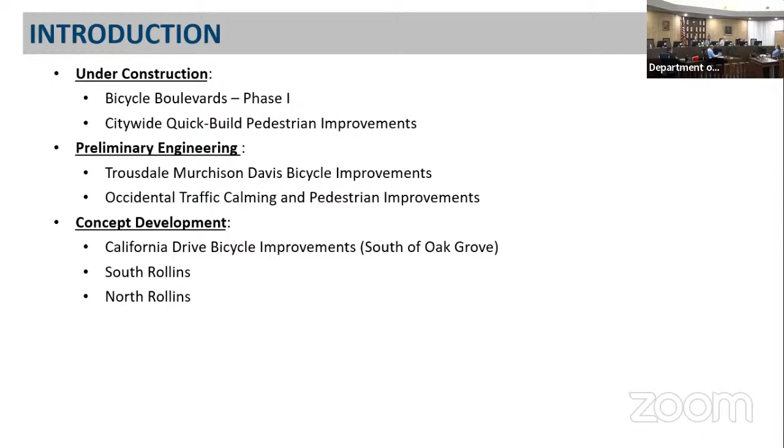So just quickly going over, this is the Bicycle Boulevard project, Grove Mills - that was the one I missed. Along these routes, some improvements were put in, some speed cushions, which you've been seeing about, we'll talk about later. And then stop signs, new green-back sharrows, things like that have been placed on this project. I think we also improved some intersections while we were there. So there's that project - the Bicycle Boulevard project, which should be wrapping up this summer.

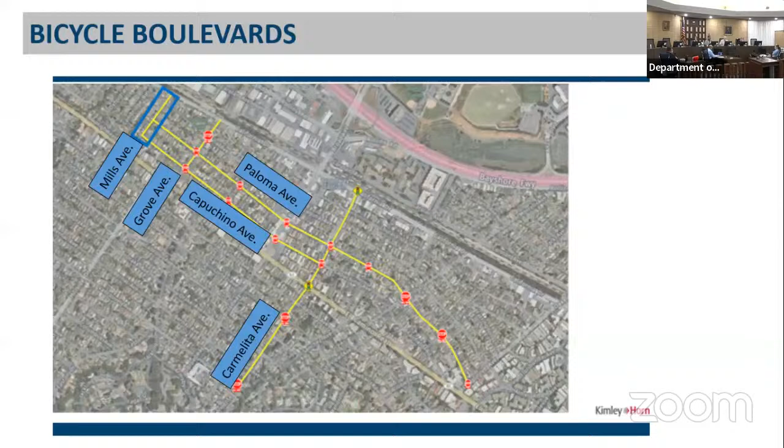This is the pedestrian quick build project, this one being grant funded, several locations where we did enhanced crosswalks, flashing beacon out there at Airport and Beach, which will come online pretty soon. And then those bulb outs where we're tightening up the intersections a little bit to slow people down, so that they have to slow down to make the turn rather than roll through.

Again, the Candyland chart, as you can see, these are well through it. They're actually under project construction and soon to be completed where we have to close it out. So those are pretty far along. That said, we'll talk about that one a little later under our update to give you just a little bit more.

Now, Murchison, Trousdale, Davis Bicycle Improvement Project. So this is a project where along those 3 streets, spanning from Murchison from California to Sequoia, Trousdale from California to Quesada, and Davis from Albemarle to Quesada, we're talking about putting in bicycle facilities on each of those streets. That ranges from Class 2B, which is a Class 2 buffered facility, to just a bicycle boulevard.

So we've met with the community once on that, and we're going to bring it back to them, and you'll see when the next tentative date for the next meeting is. But I think I'd like to see if we can bring that back even to TSPC, just to try to reach out to as many folks as we can via Zoom, where they can attend and watch it on Zoom, maybe if they can't attend in person. So maybe add another layer of outreach. And so here's the Occidental.

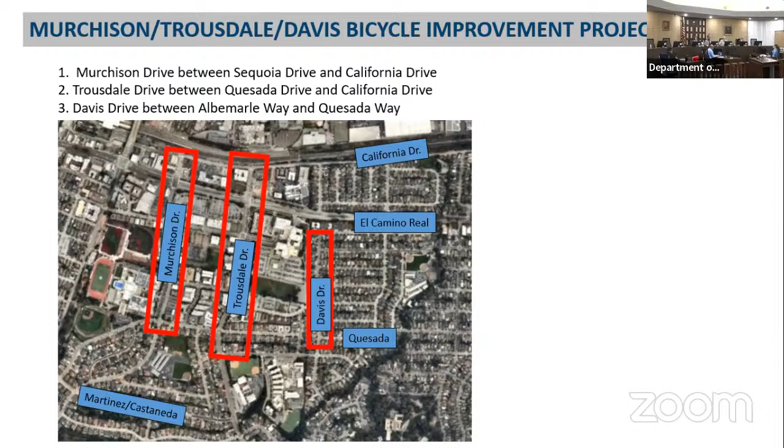Occidental, both Chapin and Ralston, we're doing some improvements there. Again, you could see some of these pork chop islands put in. We're trying to square up those intersections that are not square - they're offset and they're angled. So we're trying to do some improvements there.

We will bring this one back. Harry had been to the community twice. I think we've nailed it down pretty well, and we'll share it with you folks, and then you'll be able to see how the community feels on that.

So these are here in the initial design phase, where we're still getting the feedback, and then we're cranking through the design once we get that feedback. So we're somewhere in there on both of those. You're going to see that one for sure, but just wanted to give you again what it roughly looks like, so you guys aren't caught too cold.

Sorry, Mr. Wong. Sure. I'd like to just let them get through it, and then we'll do a little Q&A - questions and comments at the end. I'll make sure I write it down, if you don't mind. Thanks. Okay, and we're almost through.

South Rollins looks like this. These are some of these intersections along south of Broadway, all the way to Burlingame Avenue. We're trying to do some there, whether we call it chicanes - moving the traffic sideways a little bit so they have to slow down, as you can see there - or some traffic circles. Again, you'll see where this is at.

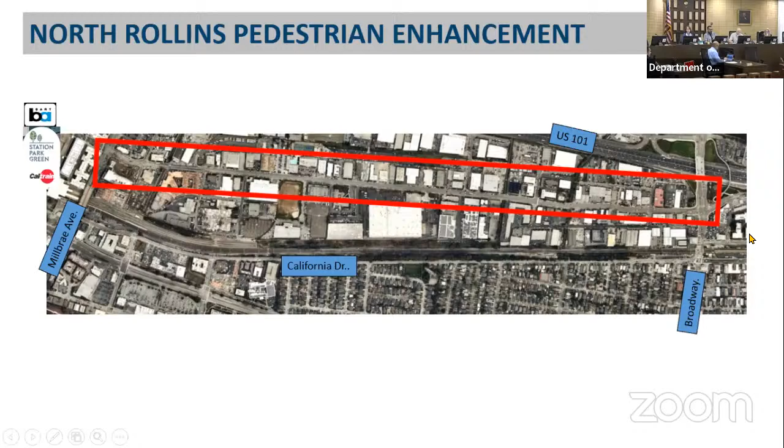And then lastly, the big one, California Bike Improvement Project. We'll call this phase 2 - phase 1 being, actually it's probably phase 3, because the first phase was between Millbrae and Broadway. So for explanatory purposes, it's now phase 2 with the other one that we just completed. We're looking at trying to do something along there to get you actually to the end, which we'll call the train station, right? Get students - they have people use that to get to BHS - but more importantly, the end destination being a Caltrain station, so you can catch that and go somewhere, as well as Burlingame Avenue.

And we are here on that one. We're in the very beginning stages. We just got grants for some of those. Council's approved some of the matching funds, and so we'll be moving forward.

So the upcoming schedule - the ones under construction, both the bicycle boulevards and the quick build, anticipated, most of it's done, but they should be done this summer. The preliminary engineering, the Trousdale Murchison Davis project, we're having our second community meeting. I think it's tentatively scheduled next month, the 6th, at the community center. I will definitely get you that finalized date and the location.

Occidental Traffic Calming Project, like I said, we've been out to the community twice. I think both meetings were productive, and the last one very productive as far as what the community wants and what seems like it'll work. So we may have that one here just to give you guys a look at it, but try to let the community know through outreach - the first one was a virtual meeting, and the second one was an in-person meeting, and the in-person one was successful. So I think we're good - we'll be hopefully pretty good on that one.

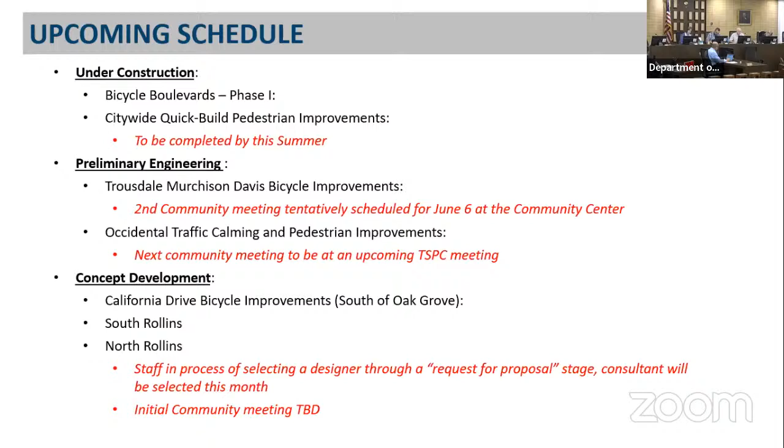I don't really have any questions or comments because it was all very clear, but I wanted to say—this sounds silly—when you pulled up the Candyland diagram to show us where we were on each project, that was really helpful to have a visual. I have to give credit where it's due though, that wasn't me, that was Commissioner Martos's idea. Nice job, give him the credit. It's super helpful, thank you. Kudos.

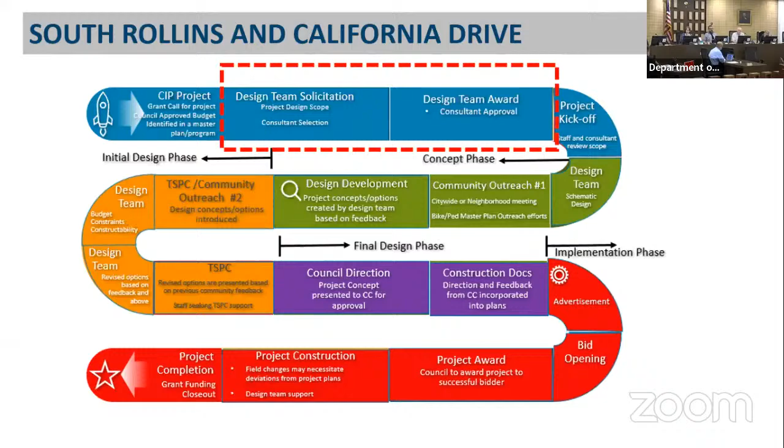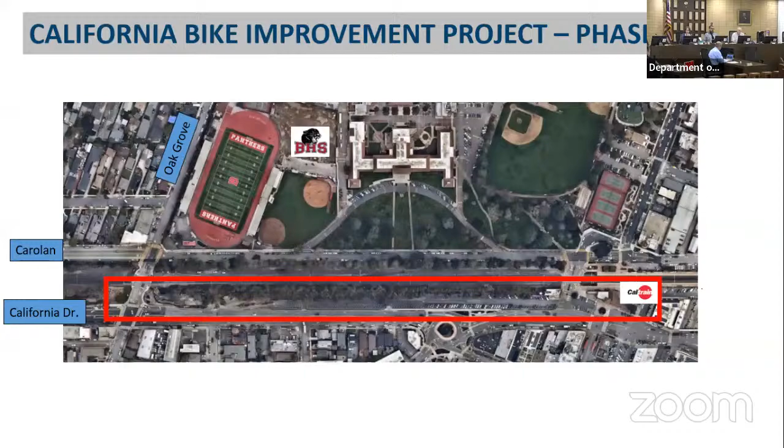It varies—sometimes we'll put something on there just to start the discussion, but what we put isn't necessarily what we're going to build. Because Occidental was in pre-engineering, the concept put out there is just ideas—not yet forming stakeholder needs into concepts. Or maybe we are.

These are a little more advanced—we started with concepts, and what we bring back next has the feedback from two community meetings, and there's a process developed out of that for how we'll proceed.

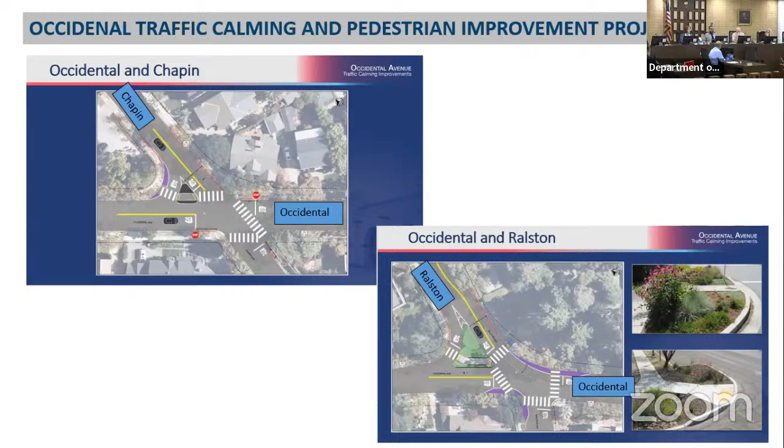In your chart it said this was pre-engineering, so I thought we hadn't gotten to the concept stage yet, but that's okay, it is what it is. I had a question about that—what was the genesis, the impetus, or the motivation to study that area?

So there was a grant we were selected for, on the bike ped master plan - we'll get to that later. It wasn't high level, but happened to be one there for traffic calming, probably through a neighborhood, put in there because of the grantor's input and was selected. Was it a result of community concerns? I recall BPD being called out to monitor speed and running stop signs - is it a response to that? Some of it. It was already in the bike ped master plan, then feedback came in, we shared it with the grantors, and they said that would be a good candidate. So kind of a perfect storm.

All right, good. So the process is working.

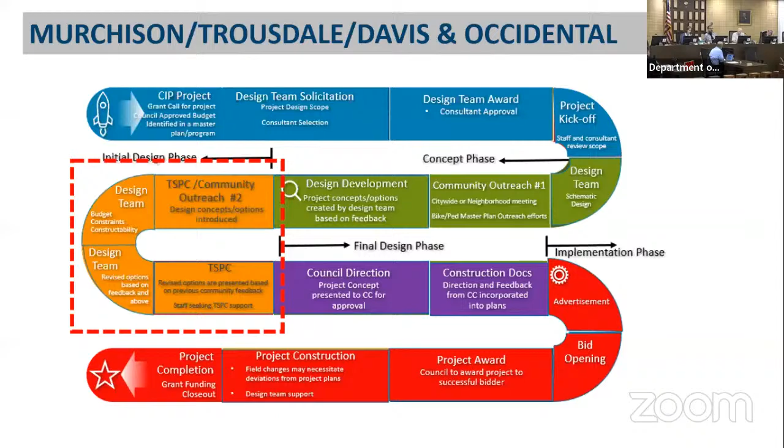I wanted to go to the pedestrian improvements, can you bring that up? Just a quick question on the first one - are all these done, in process, or planned to be done this year? That's a lot, and that's good. Yeah, but they're just striping - we can get into it on the engineer's report, but I believe it's 95% done. A lot of those, because we got some calls when they first went in. And the flashing beacon out there by the Bay Trail at Beach and Airport - we've marked it out. That's not in there yet; they need some parts apparently to complete that installation, but that's probably one of the last things here that's been installed. No, this is more praise - I'm happy to see it, even if it's just striping, or enhanced crosswalks or anything, but that's good progress.

I don't have any questions, but I've definitely noticed the quick builds around town. There's not one I'm not happy with, but some are more impressive than others - I like Howard and Lorton, that feels much safer. The Trousdale ones I think are really good, I can see the impacts slowing down traffic at those intersections. And down around Beach Boulevard, Beach and Airport. One thought - as Commissioner Cauchi would be aware, we had the 101 corridor subcommittee that sunsetted near the end of summer last year, and one of the areas in our purview was North Rollins. So I know that's going to go to concepts - I'd hope we keep that report in mind when exploring the concepts for North Rollins, at least as a reference.

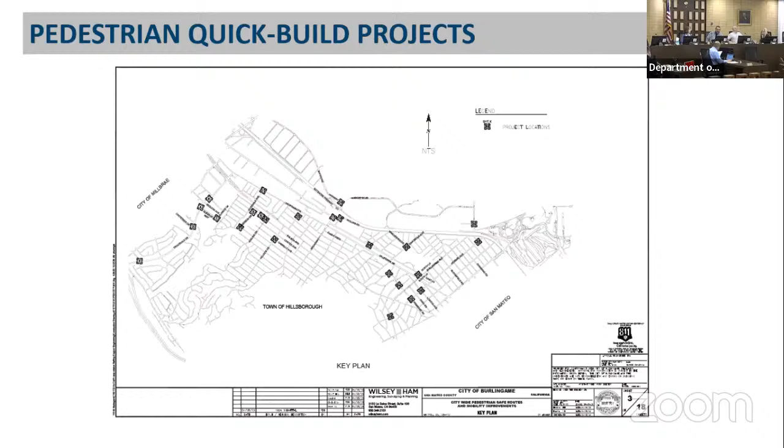Okay, we're all good. So I kind of feel like we sort of covered 6B, but I guess obviously we did not. Or did we accidentally cover 6B? Yeah, have to do our priority. It's just... yeah, I get to play around. I'm just confirming that this is actually a separate item because we touched on so much in that one. So we'll move on to 6B then. Okay, let's do this share.

Oh good, so this one, I guess I'll try to make it more interactive. So again, back in March we talked about the bike ped master plan and how we wanted to apply it to upcoming grants. I had shown you the unaddressed ones where I went through -- pay no attention to the mess below, that'll be part of it -- but all the lines through the projects that we either were working on, have worked on, or some that were completed. Even with this, you could tell we could probably add more completed ones on there, but it's the remaining ones, what we'd like done. Which ones do you think we should apply for, where we can say obviously we've vetted through the bike ped master plan, so that's already one level, but then it's gone through our commission and they support these -- and see how much weight that has when we apply for the grant, right?

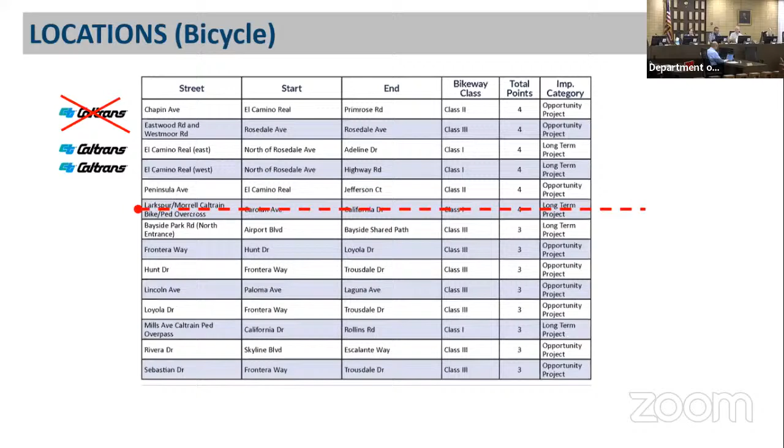So with that in mind, if we can pick off 3 bicycle ones and then pick off a bunch of the pedestrian ones, staff will go back and try to see if we could package it as a project. So turning it back over to the chair to see how you'd like to go about this exercise. I'm a little confused -- the ones that have lines through them, those you don't need to address, those we've done. There's a project, for instance, California Drive, Broadway to Carmelita -- we did that portion as well as Carmelita to Oak Grove as the Class IV facility you see out there now. So the ones that have no line through are the ones we were interested in getting feedback on and seeing which of those you're interested in. So we're going to try to pick from California Drive Howard to Peninsula, Oak Grove, Dwight neighborhood, Cadillac neighborhood, Oak Grove, Primrose, Howard, El Camino, Adeline, Bernal, and take 3 out of those -- as well as 5 peds.

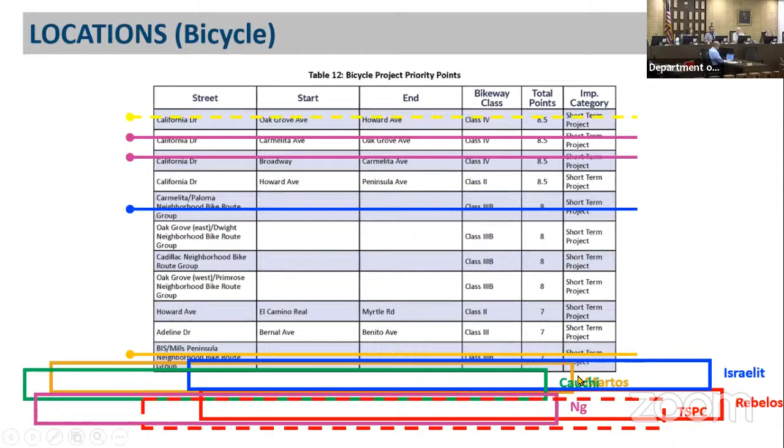We're using the overall schema. Just let's see which ones have choices. My concern is I can't see all of them on one page.

Take the pages off, do this. I kind of figured we'd see. Pay no attention to what I voted for. I'm not... don't be wrong. I haven't written... oh no, I have, never mind.

There we go. Let me ask my fellow commissioners this - have you all given this some previous thought? Yes, yes, yes. Okay, so that's more than I have. So then I know what I'm going to do.

All right, I'm going to hang on to this for a minute. You can obviously use it for your notes. I'm going to, if everyone is okay with this, we'll just go and each one of us will give their three, and then we'll see how coalesced we are, and then we'll go from there.

Okay, because if we all say the same three, you get a special box, a box with dashes on it - a rainbow box. I was prepared. Let me borrow that if you need it for reference. I'm gonna go last, I know what I'm going to talk about.

So let's start - we did the last one right to left, so we'll start with Commissioner Cauchi. So I'm going to add a little flair to this.

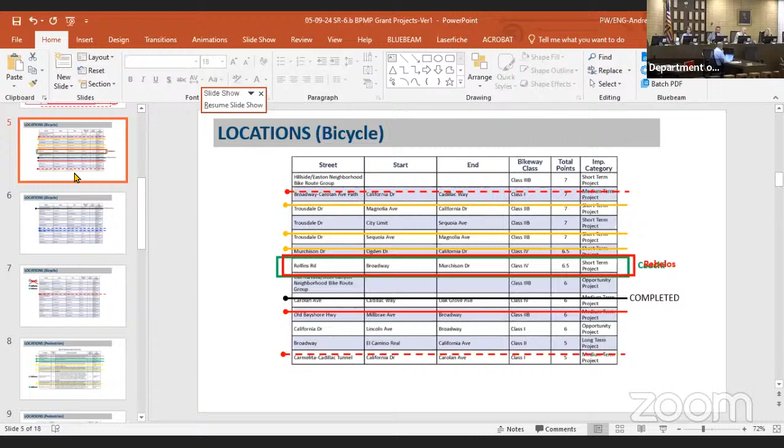Yeah, well, I mean, this round, we're just making comments? Well, I'm going to switch - if we're going to coalesce, or if there's just comments to make a point of why maybe somebody missed something, what your opinion is on that.

Well, I think the reason Oak Grove is important is it goes past McKinley and to the high school, so I think that's why it's a bike route. It's also, I think, one of the east-west connectors going to the bike lanes we have on Carolan and California. So that's one reason why I picked it - it connects two schools and connects east-west.

As far as I drive downtown recently, I don't know that I have ever seen - I found it surprising to see it on the list because I don't think I have ever seen bikes. Even when kids are going to school, they tend to go on Balboa and come to school that way. So to me, it didn't make sense at all - I couldn't see how it worked. It's super congested right there.

As cars come off of El Camino up Adeline to take kids to school, either Mercy or Lincoln, most Lincoln kids avoid it because it's not the safest place for them to ride their bikes to get to school. They come down Balboa instead. So I actually really don't like that option, but I don't know if it's going to happen anyway, since it's on the list.

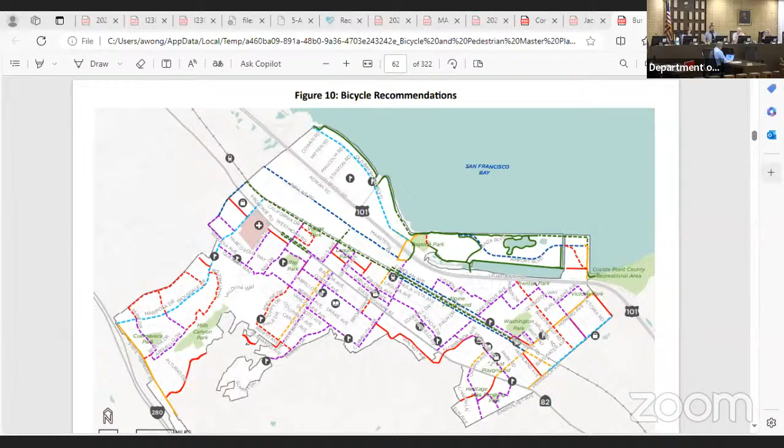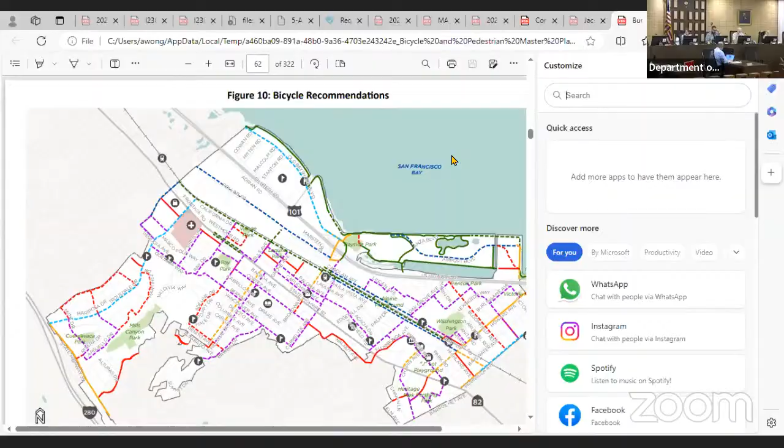Which one was the last one? Cadillac Neighborhood Bike Route - so the two Oak Groves and Cadillac Neighborhood Bike Route. Is there any way you could pull that up? Yes, it's right there, that little purple piece - right there by where the Audi is, connecting it, where then you go on the bike and enter the bike overcrossing. And that would be a quick build, correct? Yeah, that's just a small sharrow, but it would still be a project - we'd do outreach because you may have feedback from the businesses there. Does that connect all the way to the bike lane on Carolan? It does.

Through the chair? Sorry, I was just going to indicate, again, we don't have to come up with the same three things. We don't have to, because... No, but I mean, I reiterated. I just feel like at this point we're very scattered. Like I don't see a lot of alignment, but I think I'd have a path to that. I just have a couple of questions though. And I'm watching the clock, believe me.

So Cadillac, it just links - I want to fully wrap my head around it. So it's basically linking Carolan to Rollins? Yes, I mean, in essence, it's already there. It's just enhancing that with some sharrows.

And maybe some traffic calming. Indulge me one more time - why do you think that's so valuable? I'm not criticizing, no wrong, no right, I want to hear it again. Is it about traveling to Bayside across the overpass, the O'Mahony overpass? Actually, I get it.

Traveling down Carolan, there's nice bike lanes. And people want to get over to that O'Mahony Bridge to get over to Bayside. It'd be nice to complete that segment, and have some, dedicated, or not even dedicated, but sharrows and some traffic calming in that small segment.

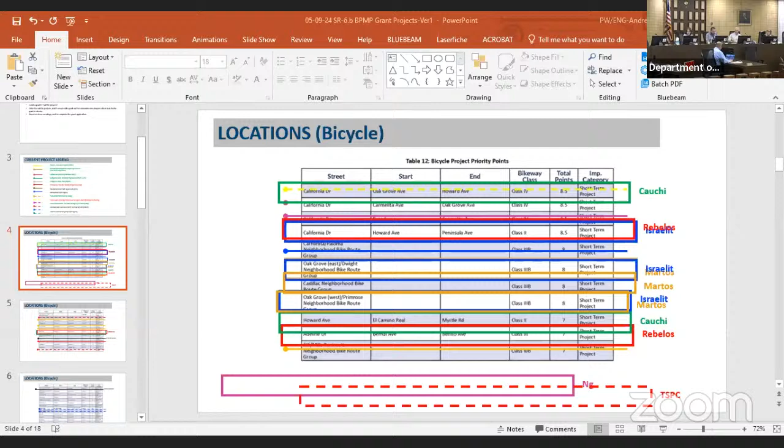It's been - I mean, obviously I worked on that 101 subcommittee, so connecting Rollins to downtown and to Broadway and to the Bayfront has been something near and dear to me. So with that, I'm now piecing together the Oak Grove East-West with the Cadillac. But I would like to see Rollins Broadway Murchison. So since I think we have two for the Oak Grove East-West, I'm gonna do the Broadway Murchison with Cadillac.

I mean, can you explain to me why Oak Grove East and West are two separate? Is it funding? Through the chair, I don't know how it was broken out, I can't recall.

But again, going back to the previous presentation, we have Capuchino, Paloma, Mills, Grove, all part of a bike boulevard project. So on this one, knowing that's important, we can combine the Cadillac, that Cadillac Oak Grove. And what Commissioner Martos indicated, those three, we can combine - that could be one project, right? We're just not going to do Class 3B because these are relatively minor.

We're not putting in a hard curb or something like that. Right, and it's just striping and mostly striping and then outreach, right, to let folks know what's happening and to minimize impacts.

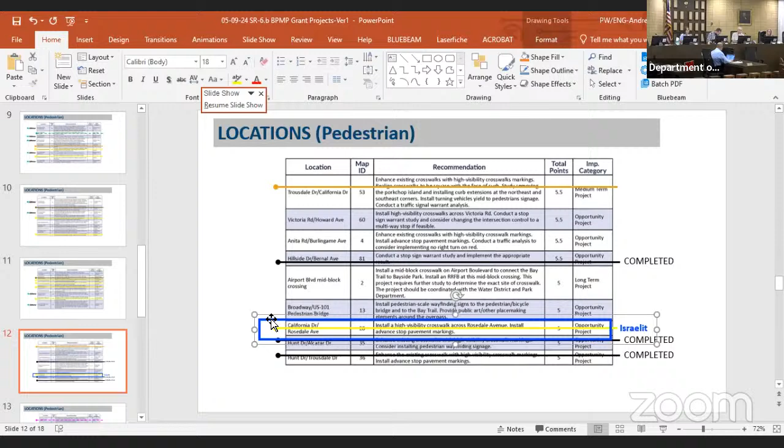Isn't that where you just put in a 4-way stop recently, or is that Albemarle and Ray? Balboa and Ray, I believe, has a 4-way stop but no crosswalks, right? So that's what I picked because a lot of kids walk to BIS, or it has crosswalks but maybe not, to Lincoln. There's tons of kids that crisscross to the 2 schools, so I think it's really important. I just picked 2 because the other ones I felt strongly about were all sort of taken care of, so I didn't have strong feelings about number 3.

Is that it? Yes, sir. Commissioner Cauchi? Right, I thought we were going this way. Oh, he's got my notes. No, but it's following how we began the meeting. Vice Chair Martos wanted to go after the right and left. So we're in the middle.

Okay, so I'm assuming the projects that have Caltrans on them will be taken care of. That's the goal. The Oak Grove and El Camino, again, because it's by a school, I think that needs extra attention. And the Burlingame El Camino needs extra attention because it's right by the downtown, but I'm assuming that will be taken care of.

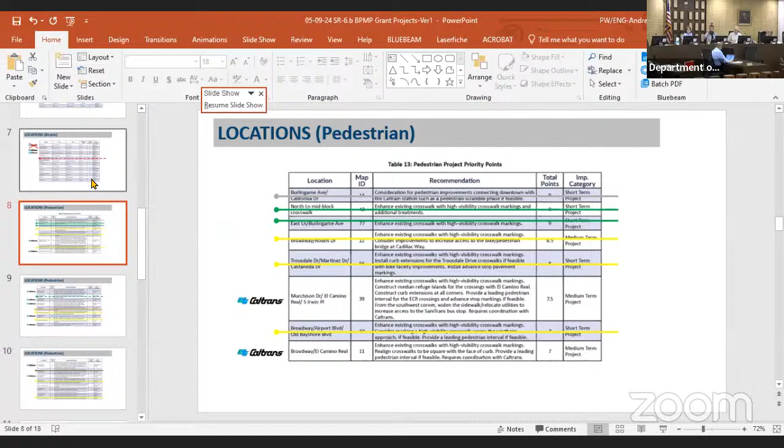The other ones that I was unsure of, just like we just talked about, so Burlingame Avenue, Lorton, Park Road, and Primrose. Those have all been done. It's actually on Burlingame Ave. And those I think we talked about a few meetings ago where we're trying to include those, again, opportunity project, trying to basically put some striping. This is the one where I worked with former Commissioner Lee about trying to just make those crosswalks pop.

And we agreed that we would just enhance the 12-inch line on each of it and leave the pavers as they are. So that's those, already happening, right? That is not happening. Well, there's not a project for it. We are aware of it and we're trying to incorporate it. So if you want to include that one, we could do that.

So we haven't designed anything, or we haven't laid it out yet. So potentially it could be done, but I haven't associated it with any work yet, either another striping project or a resurfacing project.

Can I ask a question? I know that was something Commissioner Lee had brought up, but I didn't realize that had been decided to happen. Because we do have the decorative pavers, and we have stoplights and stop signs at all those intersections where cars must stop. I thought with this group we talked about it, so for instance, you have the pavers and you have those concrete bands that hold the pavers.

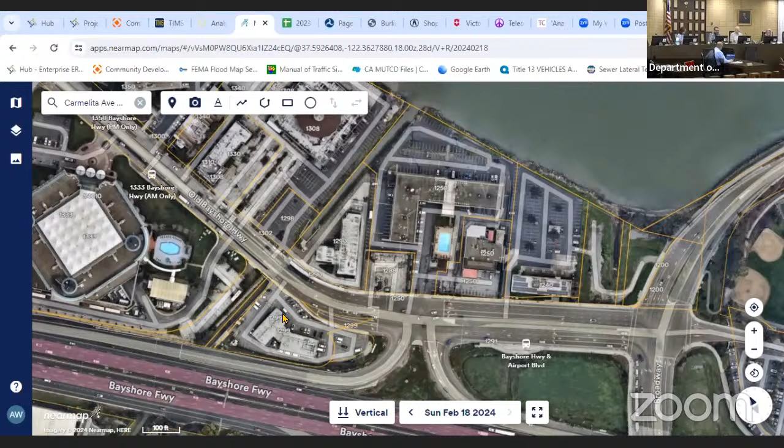If they get all the way up to where your arrow is, there's no place to cross there. So there'd be signs back there to say, cross now, a barricade or a barricade sidewalk, or last exit before toll.

I thought there was also going to be signs down near Broadway so people knew there was a pedestrian crossing. When I picked this, I thought it was also to guide people in other directions. We've looked at that a little bit, but there was still the question of when to time these improvements. I think that's where that discussion capped off.

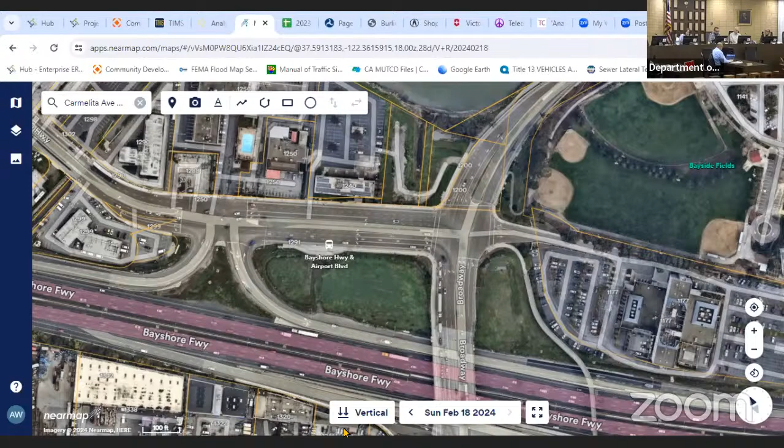My other pick was the one about making the temporary build-outs permanent. That's my second pick, and I just have two picks. I've got that one written down because we don't have it. Okay, Vice Chair Martos?

Mr. Wong, let's see, I don't know what page this is. Maybe the third page. Nope, fourth, fifth, sixth page maybe. There's Victoria Road, Burlingame Avenue - okay, these are under pedestrian. You've got the number, sixth page of pedestrian improvements. What's the total points? Total points five. Okay, that's a good way to sort.

Victoria and Howard, one more page. Oh, it's right there. Okay, it's different on my printout. So that's my number one. Oh, sorry, I'm grabbing this.

If I understand this, I see the high visibility crosswalks, great, but I'm more interested in installing advanced stop pavement markings and curb extensions.

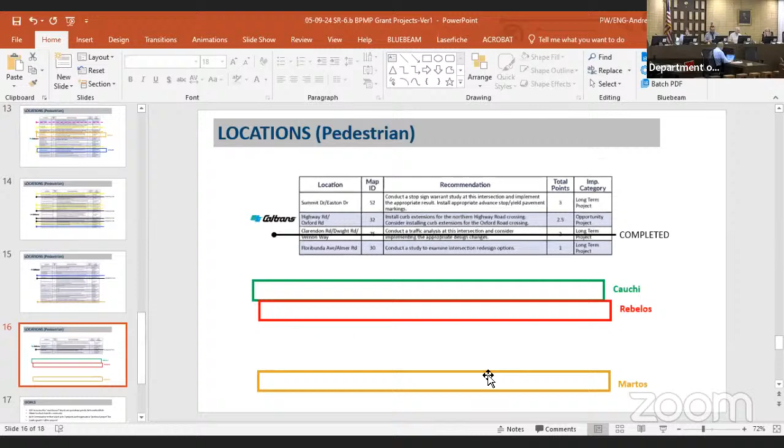But those aren't my picks. My picks for this one are easy: Trousdale and El Camino Real. I know there's a lot of pedestrian traffic between the hospital and the train station, so I'm going to go for that one. There are also two or three senior facilities there.

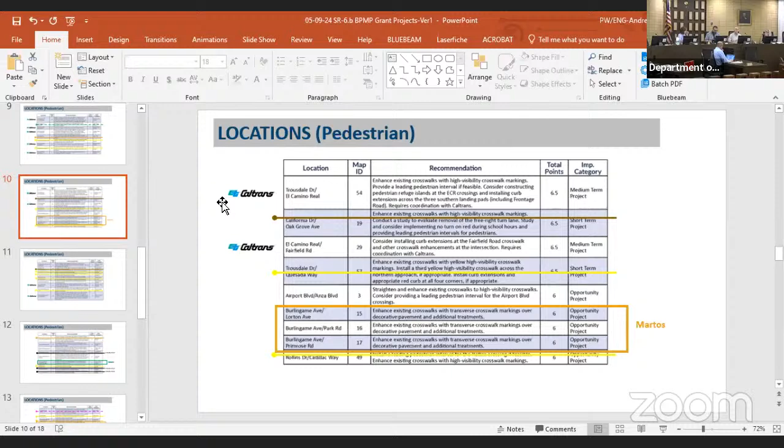And we have the new development on the east side of El Camino Real, and they'll be crossing over to Burlingame Plaza. And then Old Bayshore Highway and 101 - that's one of my favorites. And Airport Boulevard, the mid block by Bayside Fields - that's another one I'm looking forward to someday. So those are my three.

This was an easy one for me. So unless anyone else has anything they want to add. Through chair, go ahead. What was the second one? I know the first, Old Bayshore Highway and 101? Old Bayshore, yes. The first one was, okay.

Trousdale ECR? Yeah, oh yeah, that was Caltrans. Yeah, that's one we're trying to do. Old Bayshore 101, high visibility crosswalk on North Approach. And that one, that was a coordination with Caltrans on that one. Trying, because that should have this.

Yeah, through the chair, sure, go ahead. So Mr. Wong, the long-term projects, looking at this chart right here, says low feasibility, low priority. So that's not very likely that's going to get implemented anytime soon. So I didn't vote for any of the long-term projects, even though there were some I really liked, like that crossing at Bayside, but it was a long-term project. Just for my colleagues, this says low priority, low feasibility.

There's no crosswalk, no sidewalk on the other side, but yeah. No, I mean, we talked about that one at Bayside, and I took a picture. We should have something there, but if it's not feasible and the priority's low...

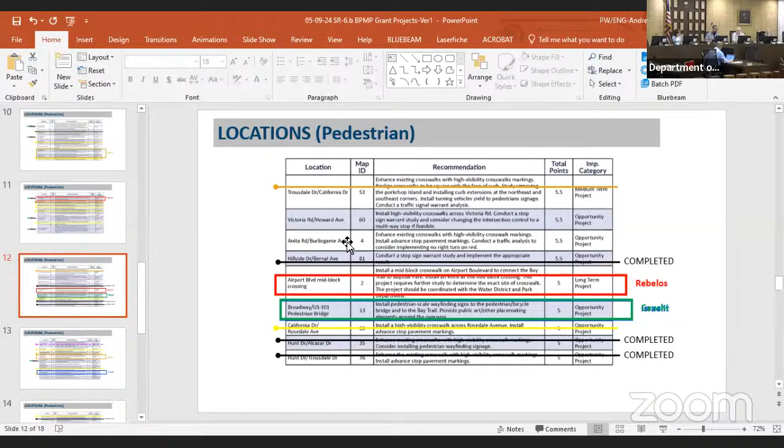And just as a quick comment, I feel like I frequent the waterfront. I feel like there's, over the last at least this year, definitely seems to be a renewed interest in the waterfront recreationally by a lot of people. I'm noticing it's way busier every day of the week. And it's also good for the city - the hotels, the buildings there, the business campuses. So anything that enhances that waterfront, I think is good. I see more and more colleagues coming in from out of town for business because I have new business in the Bay Area, and they love the Bayfront there.

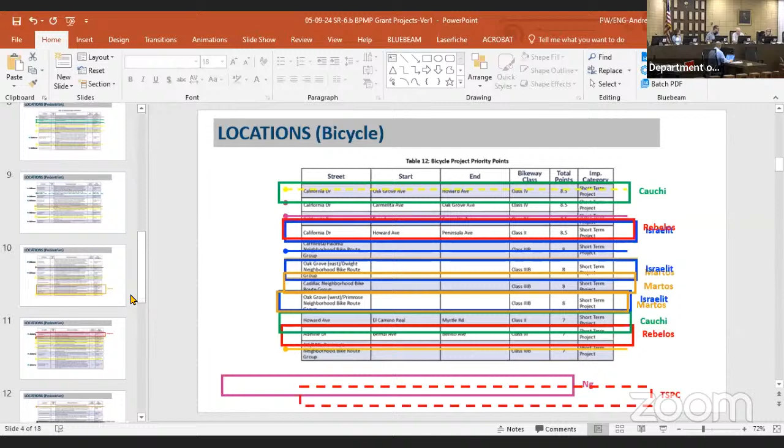So that's just - I was at Kincaid's last night and there was standing room only, packed. That's good. What was tonight? Tonight's Wednesday - Thursday, it was Wednesday night. It was packed.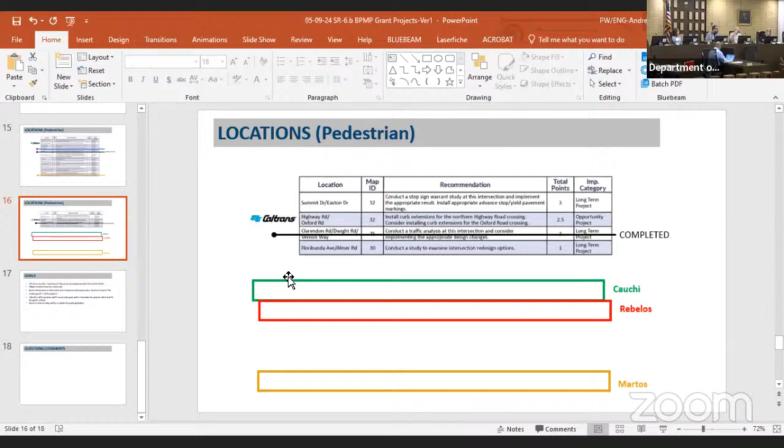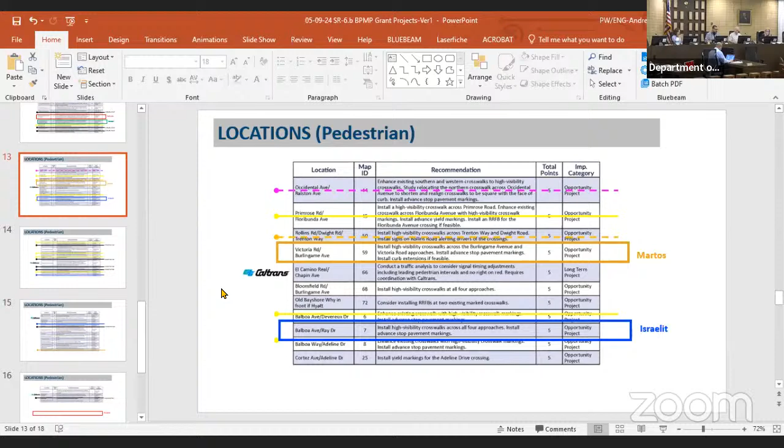Just real quick, since I only voted for 2 - if you go back to the ones that had the 5 rating, there was Burlingame Avenue and Bloomfield. Yep, I'd add that one just because that is a school route. There's one of mine, too. Tag, pick 'em, there we go.

Couldn't pick 'em all. Okay, so I think we're done now with 6B. Anybody else? Do we need to take any public comment?

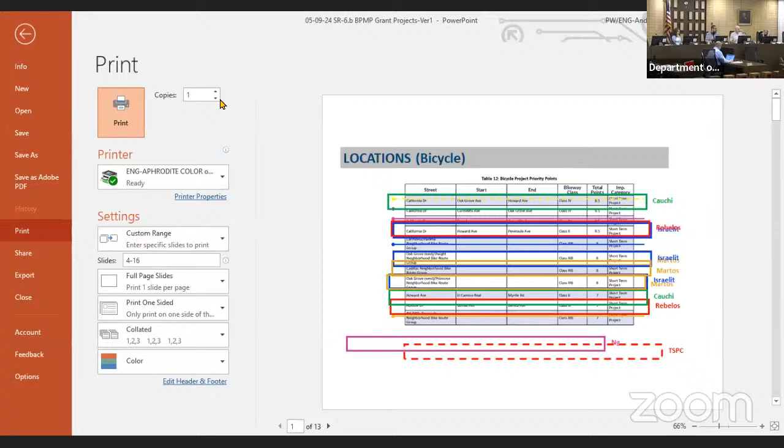I have an email to read for the record. So this email comes from Andrea Capazzoli. Hello, Syed and Andrew - Donna forwarded to me a response to the email I sent to her regarding the new traffic adjustments, parentheses, speed bumps.

Oh, you can't hear me. I'm not muted.

Is this better? Oh, yeah.

Hello, Syed and Andrew. Donna forwarded to me your response to the email I sent to her regarding the new traffic adjustments, speed bumps and stop signs on Carmelita Ave. I appreciate your immediate response to her communication and wanted to formally add my concerns to this evening's meeting agenda.

While I can understand the goal to reduce the speed of traffic on Carmelita from east of El Camino Real to California, the speed bumps now installed from ECR through Vancouver feel excessive for the traffic patterns in this section of Carmelita. I live on Drake Avenue and have been a resident since 1997. I can confidently share that I am aware of the traffic patterns for the last 25 years.

While there is heavy use of Carmelita during Roosevelt's drop-off time, the speed pattern is not overly excessive compared to the other portion of Carmelita. Several of my neighbors have children, and we walk our families and dogs multiple times daily on Carmelita. I'd like to bring the following items and observations to the commission.